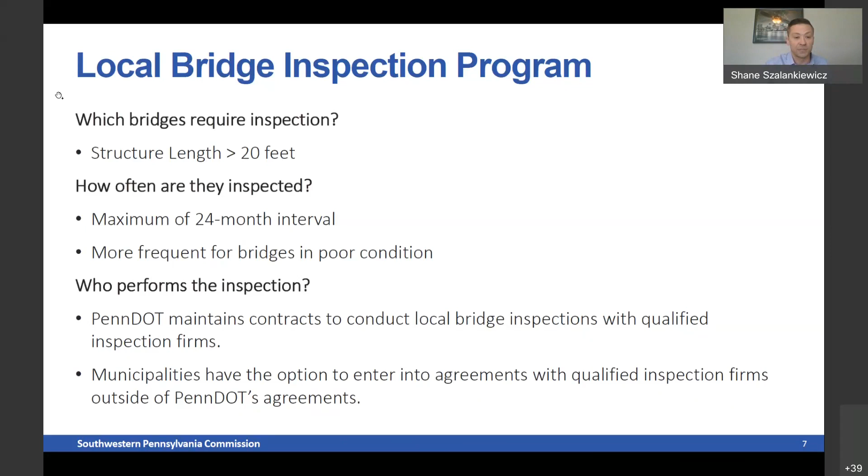Now, who performs those inspections? Well, there's two different ways to do it, but in general, these bridge inspections are performed by certified bridge inspectors - qualified people from consultant firms that inspect the local system. PennDOT maintains consultant agreements for the consultants to use, and the municipalities also have the option to enter into their own agreements with their own qualified inspection firms outside of our agreements. Next.

More on the bridge inspection program. So who pays for these inspections? PennDOT selects consultants for these agreements that the locals have access to. With those agreements, it's 80% federal funds and a 20% local match. The 20% local match is deducted from the liquid fuels funds, so there's really no out-of-pocket payments required from the municipality.

It's a pretty seamless process, and it's something that we recommend. If someone would ask us whether to use our consultant agreements or get your own, we feel it's best to utilize ours. We select those consultants through a consultant selection process, and we have good faith in those inspection firms.

Now, the other option is a reimbursement agreement. So if you decide you want to hire your own inspector, it's a little bit different process. That municipality will get that consultant on board, and they will pay 100% of the costs. Then the municipality has to request reimbursement from PennDOT, and we process those invoices in ECMS, and then the municipality is reimbursed 80% of the cost. So it's a little bit more of a process if you choose to go that route.

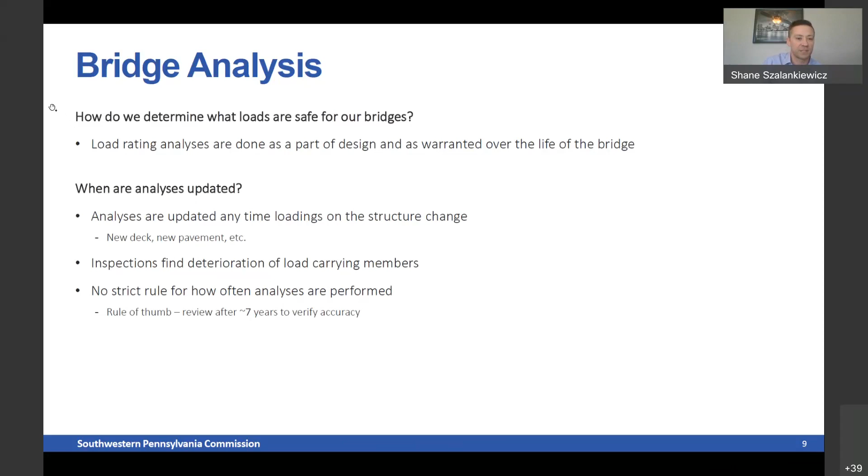So moving on to some priority maintenance repairs. Our inspectors are out there and, like we said, they're going to note all that deterioration in the structure, and they're going to come across some important things that they see. Those are priority maintenance repairs.

And those are priority 0s through 5s, with 0s and 1s being the most important. So if an inspector notices a priority 0, that repair needs to be completed within 7 days. It's time sensitive, just like a priority 1, not as critical as a priority 0, but it is a high priority, and it needs to be completed within 6 months.

Now, there are 2s through 5s. Those are important, not as critical as 0s and 1s, but it's good to know what those priorities are. It's good to know what the inspectors are finding, and it helps you have an idea of what's going on with your assets. Next.

So how is a local going to find out about these priority maintenance items? If an inspector is out there and notices a priority 0, that inspector is going to notify you the same day, usually while on site, and they follow up with a letter to confirm. Same thing with a priority 1 - those inspectors send out a letter notifying the municipality, sometimes the same day, usually by the next day. That's because a priority 1 gives you 6 months versus a 0 where you have 7 days to mitigate.

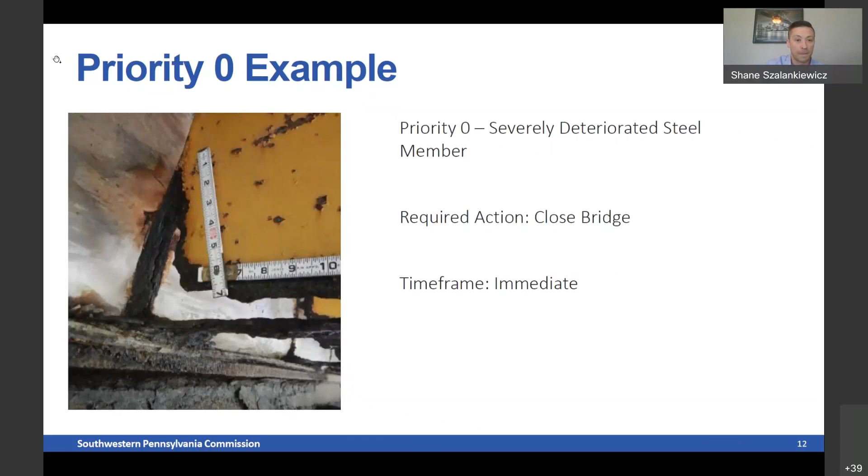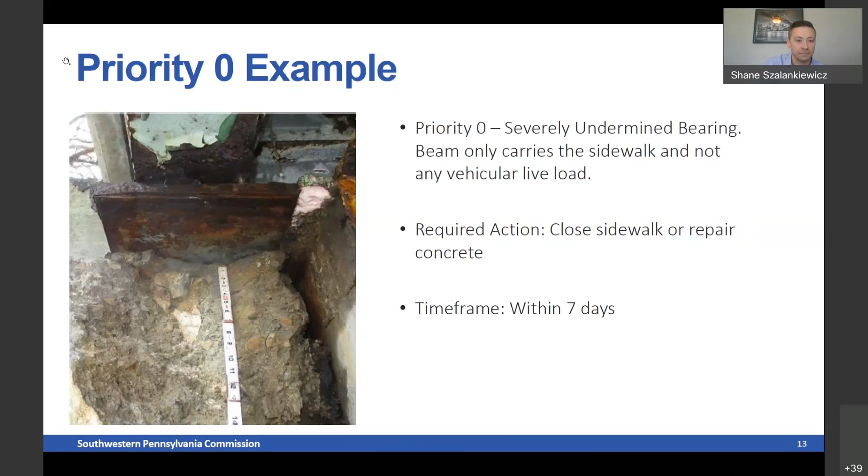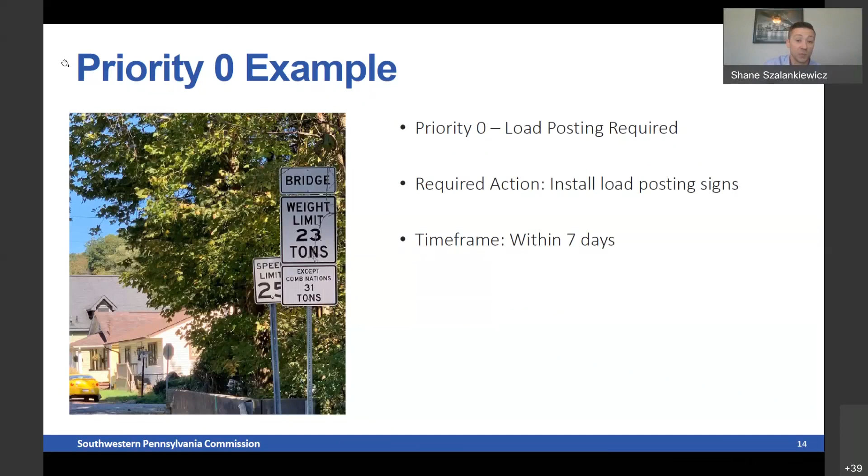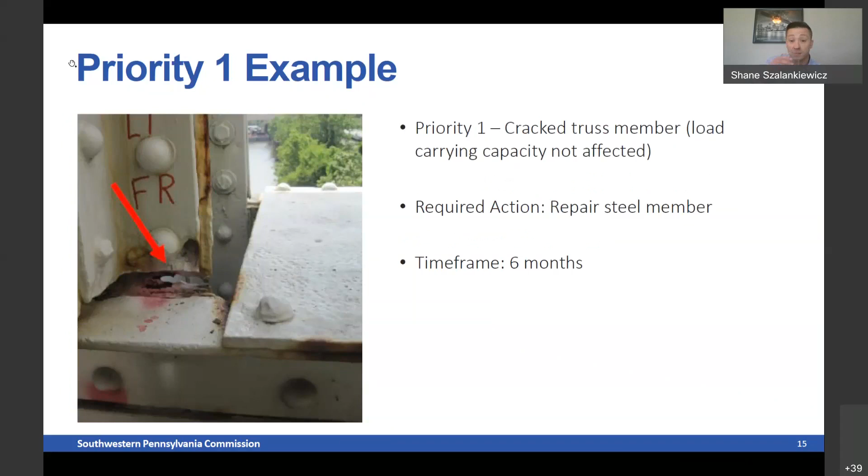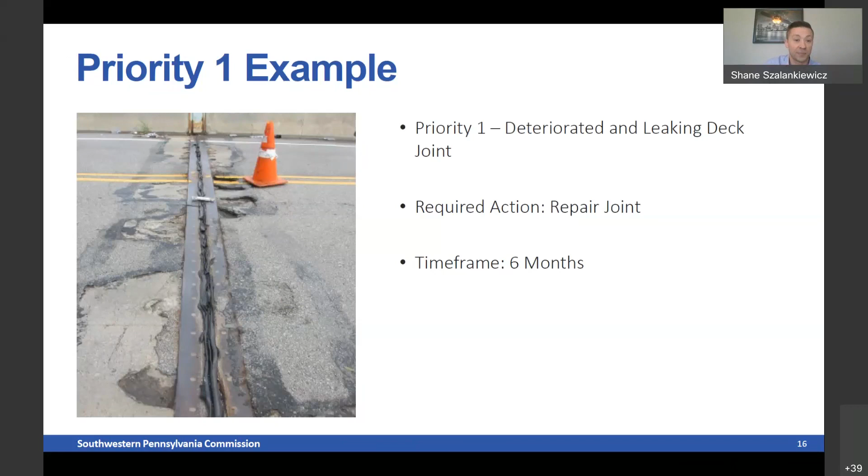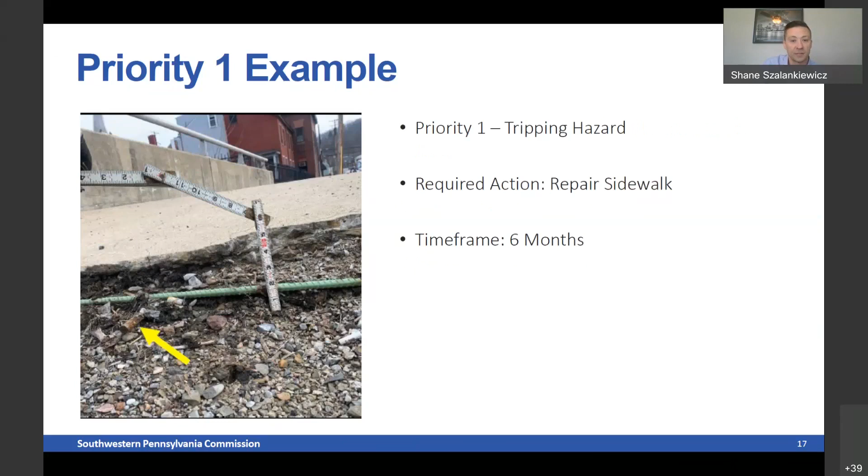Another example is a sidewalk here with a tripping hazard. It's another priority 1 - it has to be repaired within 6 months.

So we talked a little bit about inspection frequencies and analysis and some priority maintenance.

All this work is going to generate a report, and we're going to have an inspection report on each of our bridges. Once those bridges are inspected and those reports are accepted, those inspection firms are required to provide you with a copy of that report. Another way to do it is to access that information directly into our bridge management system.

Part of this report would list the bridge key. Every bridge has a bridge key - it's kind of like your social security number, every bridge has that number. So you need that bridge key number. When you go into BMS, you type the bridge key number in, and all your information on that structure will be in there.

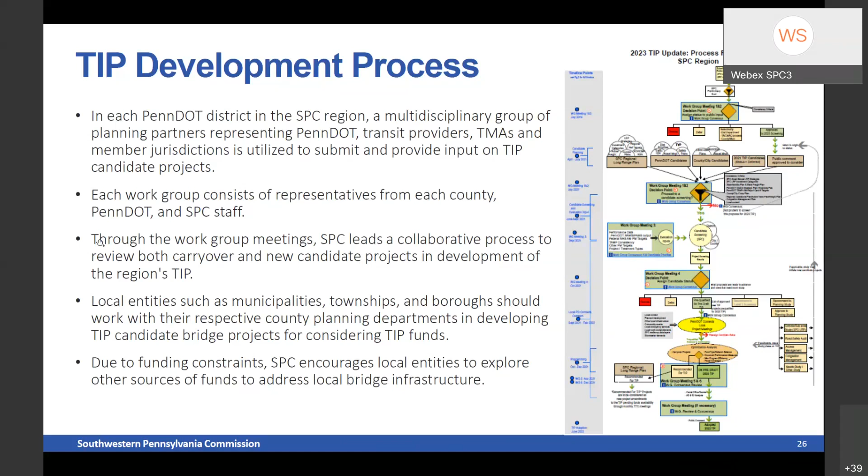Okay, I'm going to keep going here. As I mentioned, SPC is the facilitator of the TIP work groups and the TIP development process, and in this process we continually strive for collaboration.

Here's a few key tasks that we do in the TIP work groups throughout the development of the draft TIP. When we're developing the draft TIP, we must first look at what we call carryover projects. These are projects that have been started previously, in previous TIPs or the current TIP. We must continue to fund those projects through to construction. We're not really allowed to start projects and then not complete them, so that is one of our main driving factors.

The other thing we use the work group for is really reviewing statuses of all of our comments that come in, as well as our candidate projects. We also work a lot in looking at different iterations of the working TIP as we all agree on what needs to be programmed. So, for example, just to develop the 2023 TIP, in just District 11 we had 8 work group meetings. When you push it out to the whole region, we had something like 23 to 24 meetings.

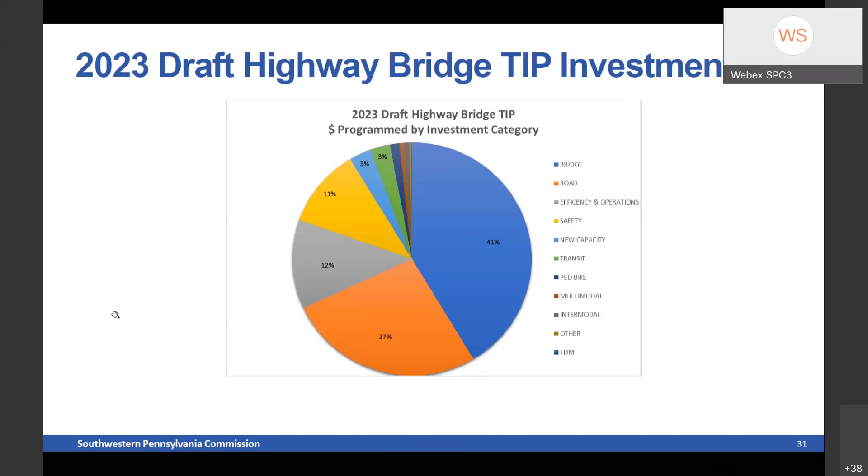It's the largest piece of the pie when you're talking about what we're investing in the region. You can see some of the other investment categories we also invest in. Obviously there's a lot of needs in the region, in all capacities and areas, but particularly in bridge needs. The needs of the region really do exceed our anticipated TIP funding.

Reiterating what I said at the start, there's funding on the local side for local bridges, which can be either TIP funds or non-TIP funds. So first I'm going to run through some fund types that we deal with on the TIP. I'll go through this rapidly, but all the information I'm touching on is detailed in SPC's local bridge funding guide. It's on our website, and I'll be providing a link at the very end of the presentation. We have a resources slide, and that link is in there.

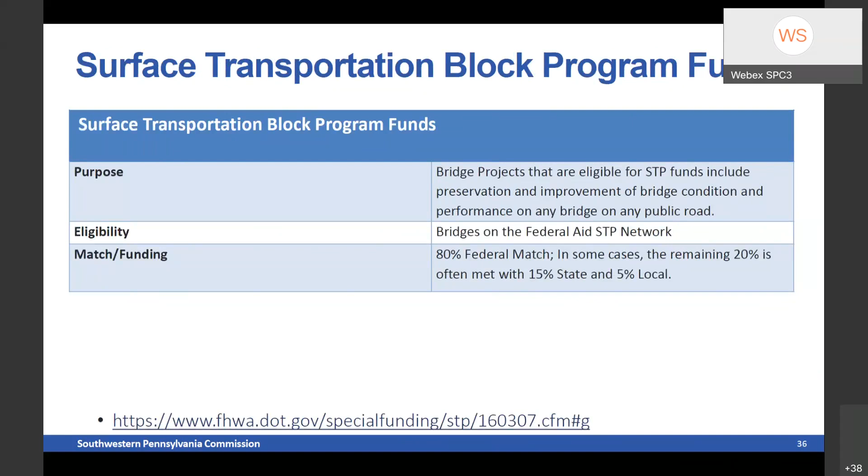The third one I'll hit on is also federal funds—what we call off-system bridge funds. This is really our most common TIP funds that we would use on local projects. Since it's federal funds, it's designed to be on bridges that are off the federal aid system. In many cases there's a 20% match, and a lot of times we can use the next fund type to get that 15% state match. That would be what we call Appropriation 183 funds—this is when we're trying to put state funds onto a local bridge. We don't have a ton of these funds, but we try to use them strategically in providing that 10 to 15% state funds on the local project.